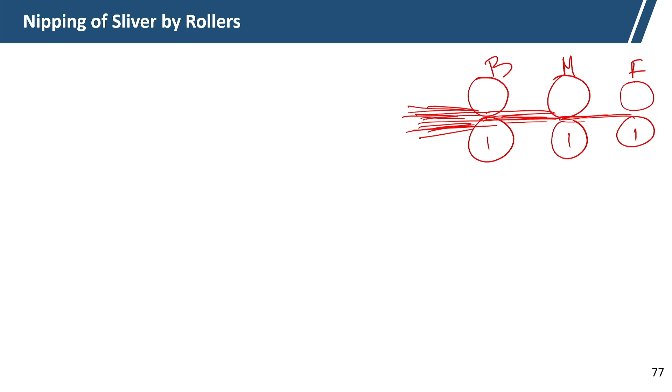The main issue here is that these are the front roller, middle roller, back roller, and these are the bottom rollers, and these two are the top rollers. So B2 is the top back roller, M2 is the top middle roller, and F2 is the top front roller.

Now the main drive, through the gearing arrangement, is given to all the bottom rollers. And the bottom rollers drive, with the help of frictional contact, gives drive to the top roller. Top roller does not have any positive drive, it gets drive from the bottom roller through frictional contact, and in between the fiber mass is there.

So the friction between the fiber and bottom roller and friction between fiber and top roller is extremely important, and along with that the pressure applied by the top roller on the bottom roller through the material is also important. So without proper nipping the drafting will not take place.

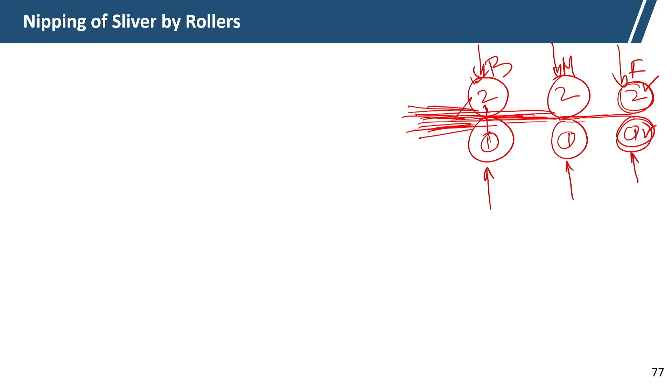So ideally there should not be any roller slip, the surface speed of the top roller must be equal to the surface speed of the bottom roller. So that we will discuss. First we will discuss the nipping process, then the issues related to roller slip we will be discussing.

Now if we see the diagram, to move the sliver by a pair of rollers, these are the pair of rollers - first pair, second pair, third pair. The sliver has to be gripped by the rollers. If they are not gripped by the rollers properly, then there will not be any draft, any stretch will not be there. So simply the roller will slip.

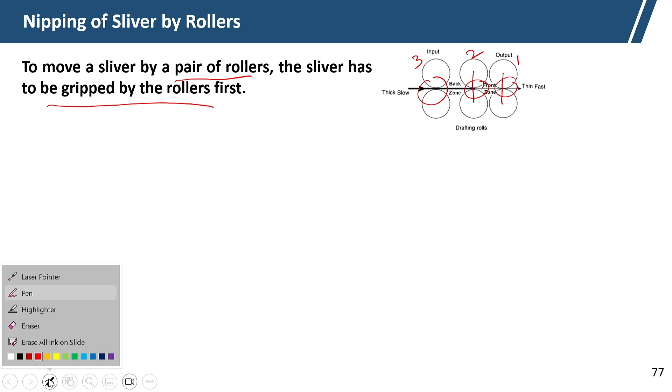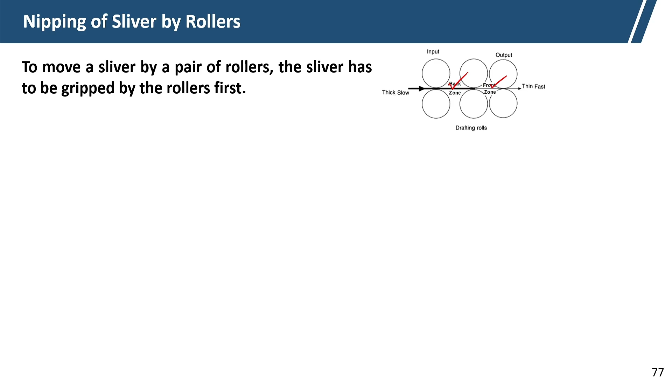Unless it is gripped properly, the motion from the bottom roller will not be transmitted to the sliver, and from the sliver it will not be transmitted to the top roller. That means both sliver and the top roller get motion from the bottom roller, through contact at the nipping point. Now the rotation of both top and bottom rollers will cause the sliver to move forward.

Now if the top roller does not rotate, only the bottom roller rotates, then the sliver will not move forward. So we have to actually move the sliver forward at the speed of the roller, that is the ideal case.

Now let W equal the force on the top roller. So force on top roller is W, and one component, here the contact angle is alpha. Contact angle is alpha, so the arc AC is the contact area, so contact length is arc AC.

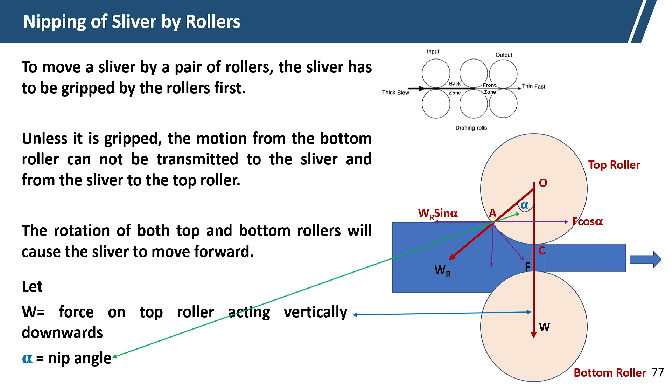Now at point O, that is the center of the top roller, W can be resolved. So here the W force is actually resolved into a radial component. So what is the radial component? This force WR is nothing but W cos alpha.

So this WR, this radial component, which is acting at point A, is W cos alpha, and in this direction W sin alpha, which will not be taken into consideration now. So W cos alpha. Now at point A, the arc AC represents the contact between the sliver and the top roller, that we have discussed. This is the contact.

Now at point A, the frictional force F acts tangentially. So when the roller rotates, the sliver is actually pushed by the frictional force, and it acts tangentially on the sliver, and frictional force F tries to pull the sliver. So this is pulling the sliver from the back, and then pushing it forward.

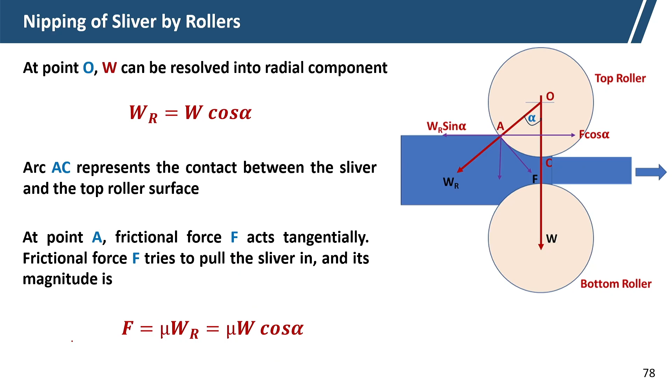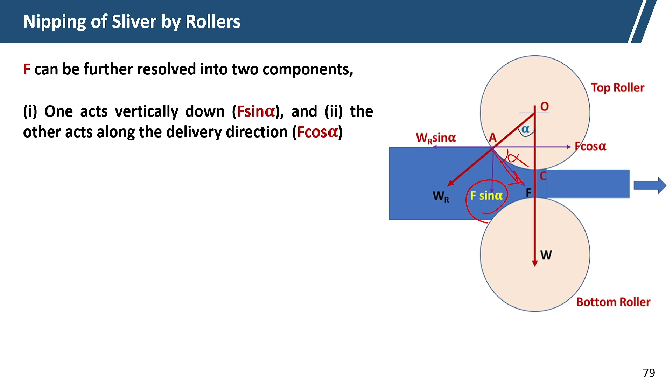So F can further be resolved into two components. This F has got two components: one is F sin alpha, and here it is F cos alpha. So this angle is alpha. If we look at the geometry, we can see this is alpha. So F sin alpha acts vertically downward, and F cos alpha acts along the delivery direction.

So this is acting towards the delivery direction, and WR also can be further resolved into two components. One acting vertically is WR cos alpha, this we are again resolving. Two components are there: WR cos alpha acting vertically downward, and another acting opposite to the delivery side, WR sin alpha. So WR cos alpha is in this direction, and here it is alpha. So WR cos alpha is acting downward and WR sin alpha is acting opposite to the delivery direction.

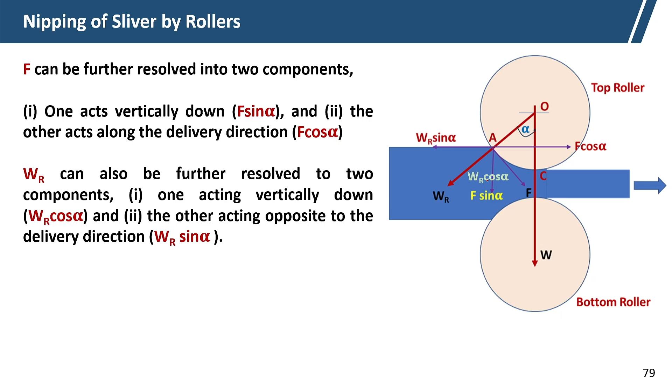So here WR cos alpha is there. Now hence WR sin alpha, this sin alpha component, therefore opposes the gripping by the roller. So that is opposing the gripping because it is actually acting against that.

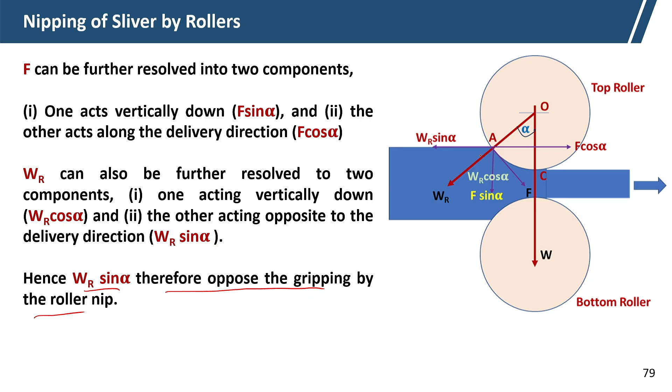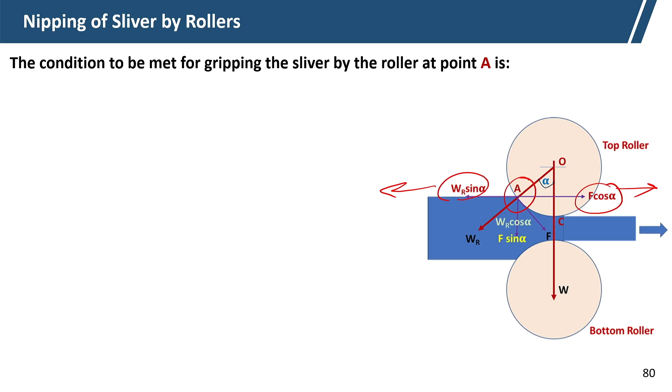So the condition to be met by this system for gripping the sliver at point A - what is point A? F cos alpha is towards the delivery side, and what is opposing this is WR sin alpha. So the horizontal component of friction, F cos alpha, has to be more than or equal to the resistance by WR, which is WR sin alpha.

So that condition has to be met: F cos alpha should be more than or equal to WR sin alpha. So in that case, in this condition the nipping will be proper.

So from this equation we get F by WR more than or equal to sin alpha by cos alpha. But F equals mu WR, we know F equals mu WR. So mu will be more than tan alpha, since F by WR is mu.

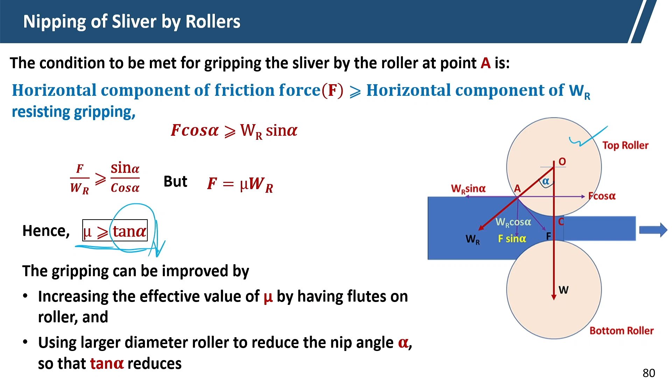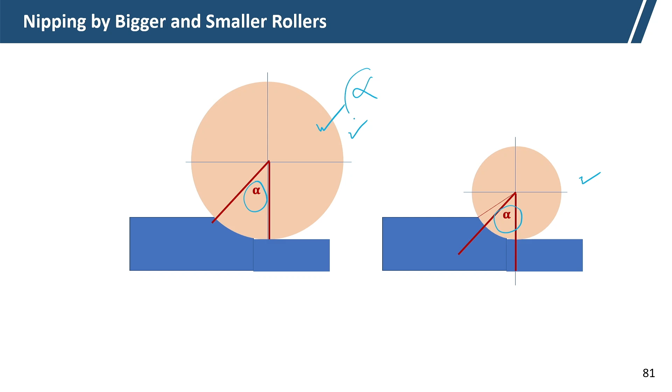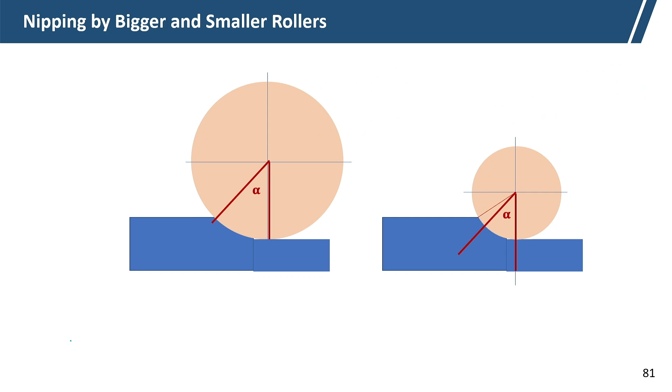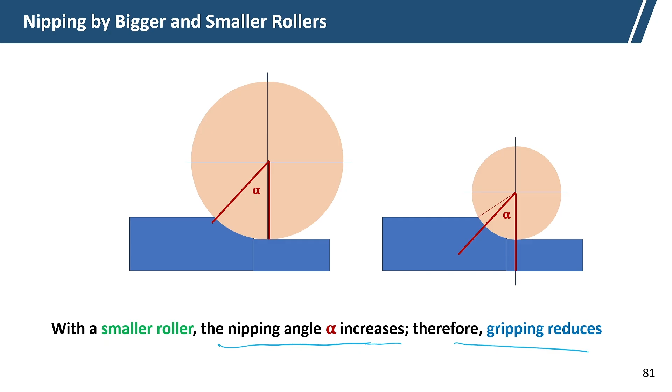Now we can see in this diagram, one is the larger diameter and here is a smaller diameter. We can see the alpha for both cases. For larger diameter roller it is alpha contact angle, but for smaller diameter roller, there is an additional contact angle, alpha plus delta alpha. That is the reason we always try to use the larger diameter roller at the top, to have better contact and reduce slippage. With a smaller roller, the nip angle alpha increases, therefore gripping reduces, so we have to increase the gripping.

Now our next topic is roller eccentricity, which is a very important aspect. This generates a fault due to roller eccentricity, giving a periodic fault, that ultimately cannot be eliminated even at the yarn stage, and the fabric appearance will be poor. This defective roller due to eccentricity can be identified using the spectrogram method, which we will discuss subsequently. But first let us see the implications of roller eccentricity, and we will do some theoretical calculation.

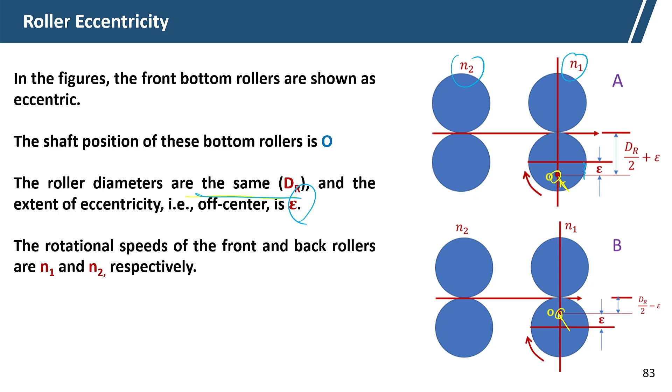Now let us see the velocity of the input rollers. This is V in roller, where dr is the effective diameter of rollers, and all rollers have diameter dr. The formula is pi d n, or 2 pi n times d by 2, which gives pi dr n. So the velocity of the feed roller or input roller for both cases can be obtained as pi dr into N, for both rollers.

But in case of the front roller which is eccentric, the velocity will not be equal to pi dr N1, it will actually vary due to the eccentricity. At position A, when the effective radius is more, what is the effective radius? dr by 2 is the average radius, plus epsilon is the effective radius at that point. So here it is dr by 2 plus epsilon, that is the effective radius.

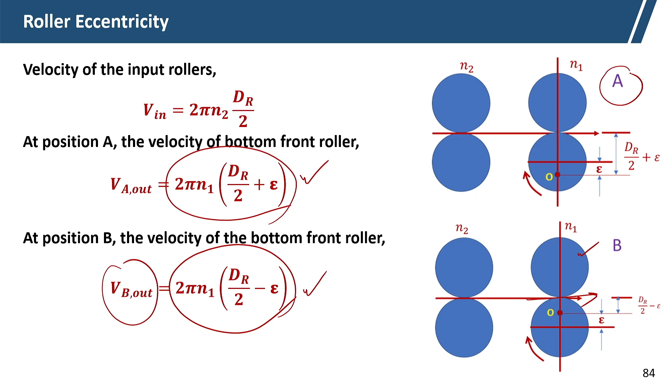So at point A there will be maximum stretch, because the back roller is moving at constant speed, but at point position A there will be maximum draft. What will be the draft? It is V A out by V A in, where V A in is constant, so this is the maximum draft. Similarly, minimum draft will be V B out by V A in. V B in and V A in are the same, because there is no deviation in diameter at that point.

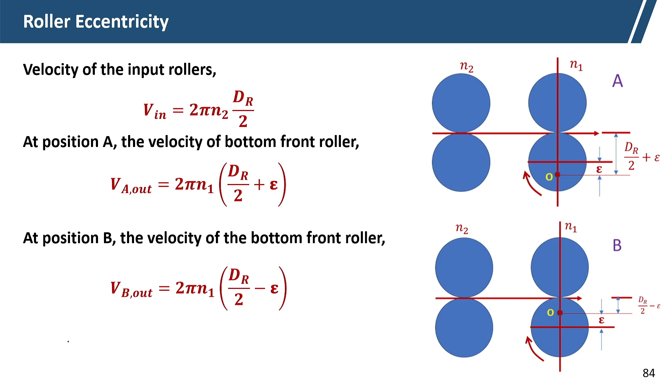Therefore, the speed of the emerging sliver will vary for each rotation. So whatever sliver is emerging, that will vary. At point A, the speed will be high with the higher draft, and at another point it will be lowest with the lowest draft. So as it is highest draft at point A, there will be maximum stretch, resulting in a thinner sliver output, and where the draft is low, it will result in a thicker sliver.

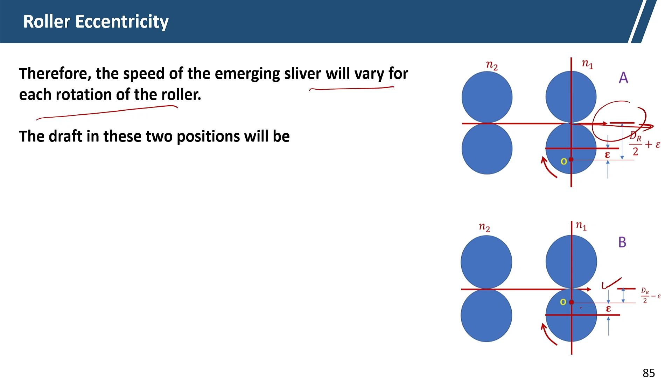So the draft in these two positions will be position A. So V A out by V in. So V A out is 2 pi n1 multiplied by dr by 2 plus epsilon, and V A in is 2 pi n2 multiplied by dr by 2. So just simplifying this equation, it is n1 by n2 multiplied by 1 plus 2 epsilon by dr.

That is the draft in position A, and the draft in position B will simply be 1 minus 2 epsilon by dr. So we can see the draft in position B is much less than, much lower than the draft in position A, and it depends on the level of eccentricity, that is the deviation from that point.

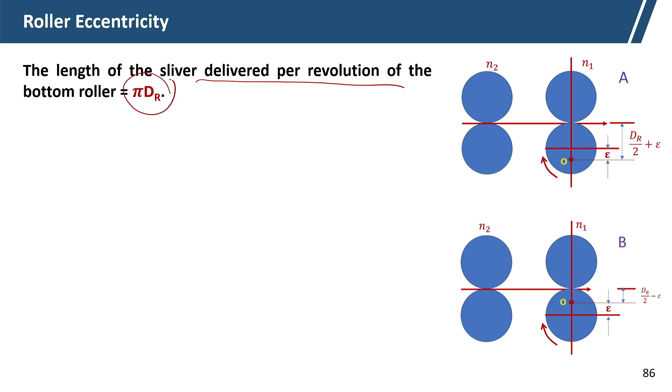So the length of sliver delivered per revolution by the bottom rollers is pi dr, that is the length of sliver delivered per revolution. So the draft will vary cyclically. So when position A reaches, the draft will be maximum, and when position B reaches, the draft will be minimum.

So there will be, as it is rotating, a cyclic variation of draft, and it will introduce a drafting wave. The wavelength of that drafting wave will be pi dr, because the effective length fed per revolution, the average total length delivered per revolution of the bottom roller, will be pi dr. So it will vary from this length to this length.

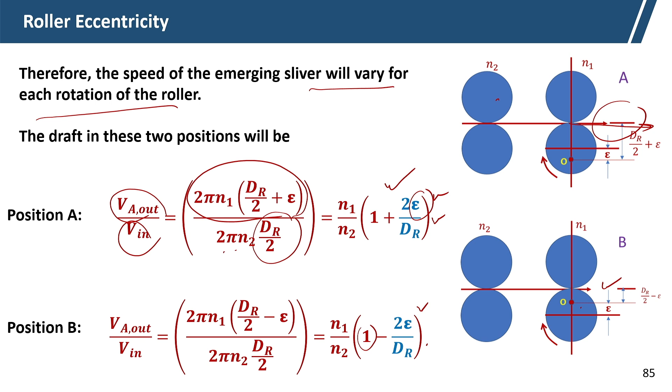So the percentage error will be calculated. At one place it will be plus 2 epsilon by dr, and at the other place it will be minus 2 epsilon by dr. So the percentage error will be plus minus 2 epsilon by dr. In one place it will be plus 2 epsilon by dr, and in the other case minus 2 epsilon by dr. That we have already seen in the earlier case.

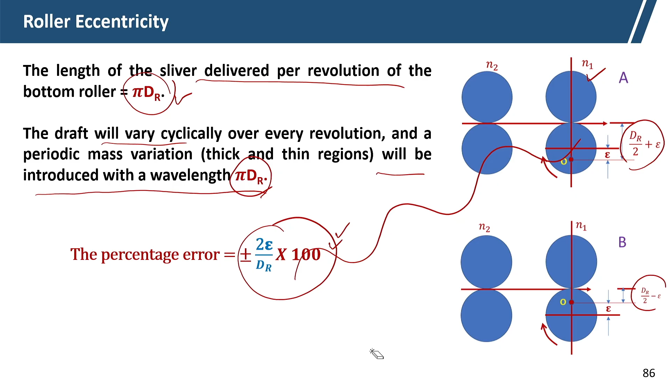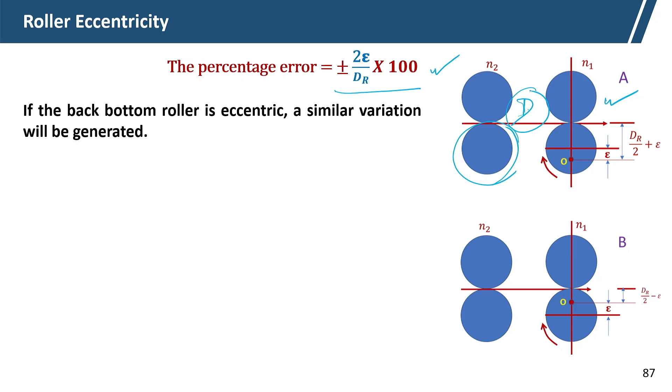That is the percentage error if the back bottom roller is eccentric. Now, what we have discussed is the eccentricity of the front bottom roller. Now if the back bottom roller is eccentric, the same error and variability will be there, the same calculation will apply, but the only difference is that if D is the draft, then it will be multiplied by the draft, so it will be stretched by that part.

And if both the rollers are eccentric, then there will be superimposition, so there will be multiple waves. So the wavelength variation is pi dr z, where z is the draft in this zone. So pi dr multiplied by z, that will be the wavelength.

So if the top rollers are eccentric, unlike the bottom roller eccentricity case, what will happen? Because as we know, the top rollers are not driven positively, they move by the frictional contact point with the bottom roller. So whatever motion they generate, their surface speed will be the same, because the bottom rollers are perfect, so their surface speed will remain the same, which is why no error will be produced.

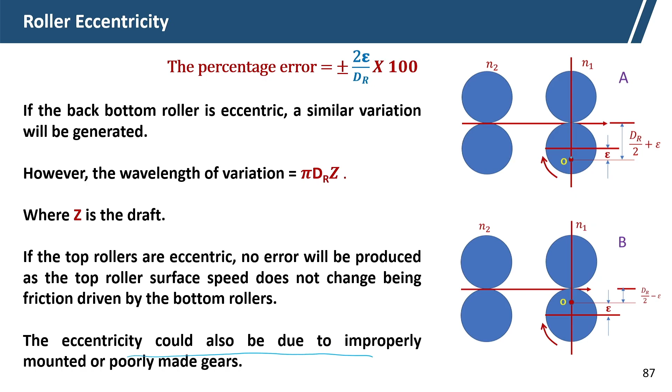Our next session is the roller slip. Roller slip is extremely important in drawframe blending, drawframe drafting, or any other drafting. Suppose there are two sets of rollers here - this is the front roller and back roller.

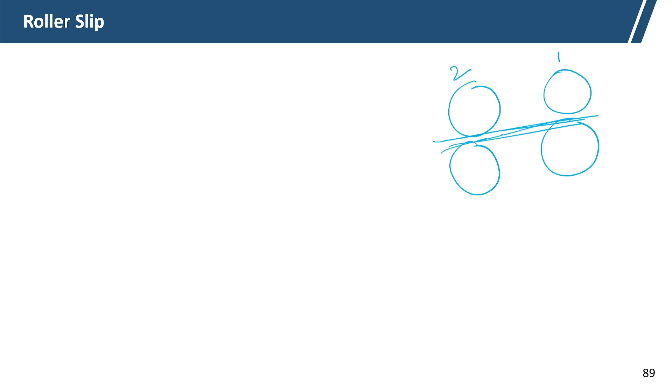This bottom roller, the front bottom roller, is rotating, and the idea is to pull the fiber at the same speed - to pull the fiber strand, and through this fiber strand the top roller also rotates. The top roller should have exactly the same surface speed. Suppose V1 is the surface speed of the front roller and V2 is the surface speed of the back roller, then the effective draft should be V1 by V2.

Now, if there is any slippage between the bottom roller and fiber mass, what will happen? VS1 is the speed of the front roller sliver after slippage. So VS1 will be less than V1. The roller is rotating and moving at V1 speed, but due to slippage the sliver is getting lesser speed. In that case the draft will get disturbed.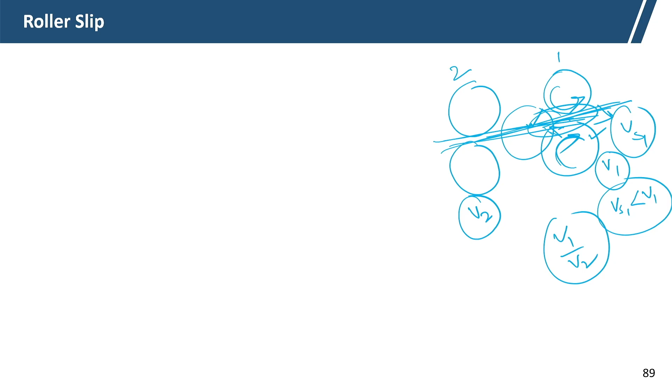So there are two types of slippage: forward slippage and backward slippage. They are related with the drafting force - let us discuss this issue.

In the draw frame, the bottom rollers are driven directly by a set of gears, positively driven, which in turn is connected to the motor. So through motor and gear, bottom rollers are driven directly and positively. There cannot be any slip, because gear does not slip. If there is a belt pulley, then there can be slip, but in case of the gear system, there cannot be any slip.

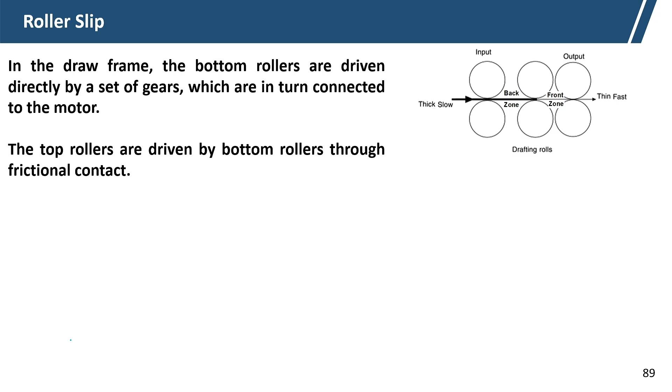So then what happens? The top rollers are driven by the bottom rollers through frictional contact, through the fiber mass. Here again the similar diagram is there - this is the bottom roller, here is the top roller, and through this fiber mass the top roller gets its drive, with the frictional contact there.

While running, there is no direct contact between the top roller and bottom roller, because in between there is fiber - fiber mats are there. A thick fiber mat stays between them, so there is no direct contact. In between the rollers there is a thick fiber mat present.

Now the bottom roller drives the fiber on it first, and the fibers in turn drive the top roller. So the top roller gets its drive from the bottom roller through the fiber mass. In case of sliver or in a drawframe, this fiber mass is very thick.

Only the top rollers have the possibility to slip. The bottom roller cannot slip - it will move at its own speed. Only the top roller has the possibility to slip, so the draft will change, because it is negatively driven.

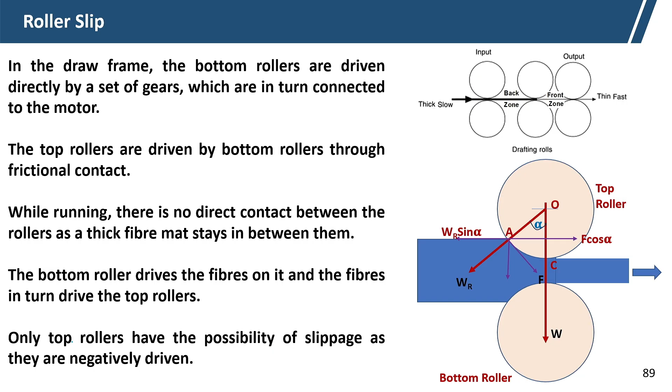The slippage means that the speed at the top roller is different from that of the corresponding bottom roller. The bottom roller is rotating at a certain speed, and the top roller rotates at a different speed. If you see the middle roller, the middle top roller can rotate higher than the middle bottom roller speed. That depends on whether the slip is forward slip or backward slip - this issue we will discuss here.

Ideally, the speed of the top roller and bottom roller should be the same, and the reason for slip is the imbalance in drafting force in the consecutive drafting zones. There is a drafting force between the zones, and if the drafting forces are imbalanced, slippage will take place.

Let us see the things here. At the back zone, the number of fibers is higher, thick fibers are there, it is compact, and at the front zone the number of fibers is lower because the back zone draft is there. Now, as we know, the drafting force depends on the number of fibers, and if we consider the nip lengths are same, the drafting force at the back zone will be higher than the front zone.

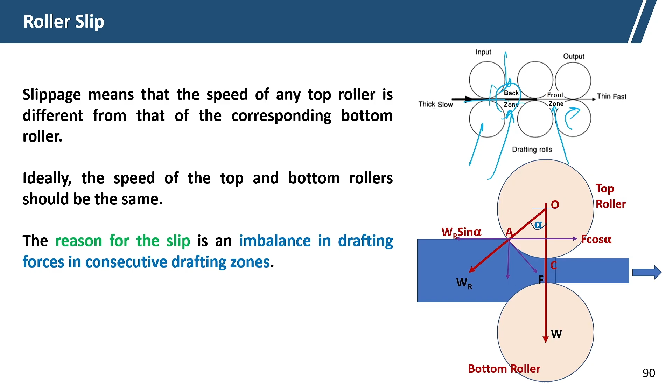Now, as it is higher than the front, the front roller is pulling the fiber strand and it is moving, but at the back zone, due to higher drafting force, the back roller is moving at a slower speed. So the fiber strand at the back zone tries to pull the roller back, giving a force in the opposite direction, which results in the slowing down of the middle top roller as compared to the middle bottom roller. This is called negative slip.

So the imbalance of drafting force between consecutive sections is the main reason for this. If the drafting force in all these sections is the same, then we will not have this type of problem.

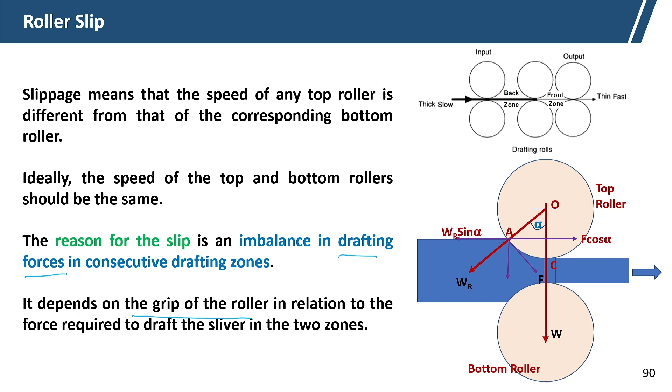The drafting force is also inversely proportional to the draft. As we discussed earlier when we derived the drafting force equation, the drafting force is inversely proportional to the draft given in the fiber strand, when the draft is above the stick-slip region.

The roller slip also increases rapidly as the setting becomes closer to the fiber length. That means if the setting is very close, the drafting force will be very high, and in that case there will be slippage. Also, if the fiber length is more than the setting, very low setting, then also roller slippage will occur as the fiber starts slipping.

That issue we have already discussed. There can be two types of slippage: one is backward slip, and another is forward slip. We will now discuss these two issues.

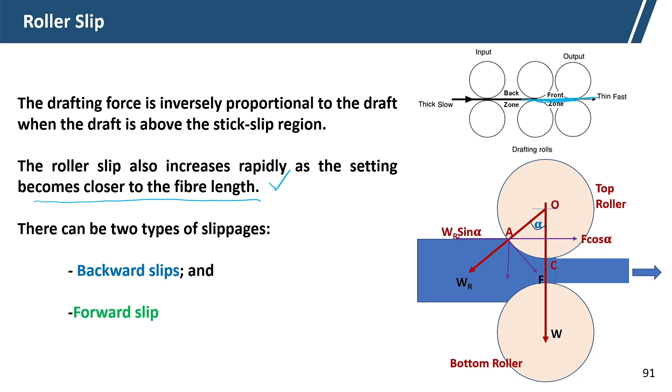Backward slip is the situation where the sliver is held back by the roller behind it, causing the top roller to run slower than the bottom roller. If we consider the second roller in a four-roller drafting system, the conventional drafting system, we are discussing the draw frame with this setup.

In the four-roller drafting system in the draw frame, considering the second roller, the draft distribution is 1.2 at the back zone, 1.7 at the middle zone, and 2.9 draft in the front zone. This middle roller is the one we are considering for slippage. What is that?

If the middle top roller slips, what will happen? V2t means the second top roller speed is less than the second bottom roller speed. So this roller will rotate at a slower rate, and there is a slippage.

Now, to enlarge this we are using this diagram. Here it is the second bottom roller and second top roller.

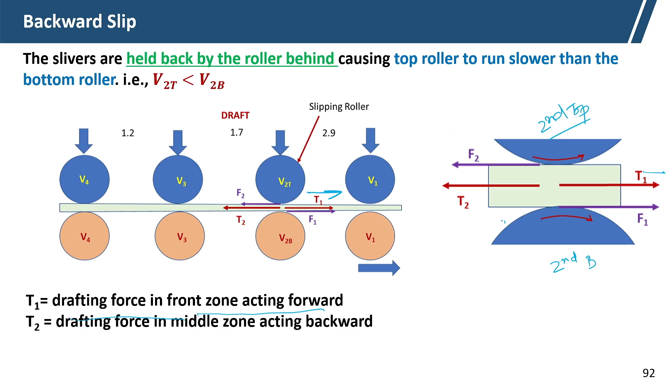Now we are discussing the backward slip, the draft T1. T1 is the drafting force in the front zone acting at the forward force, so this strand will be pulled at force T1 at the front zone. The drafting force at the middle zone is T2, which resists the movement of the second top roller.

F1 is the friction on the bottom roller, the frictional force between the bottom roller and the bottom surface of the fiber mass, which acts to pull the fiber forward. F2 is the reaction friction force required to slow down the top roller, acting backward, so this reaction force acts in the backward direction.

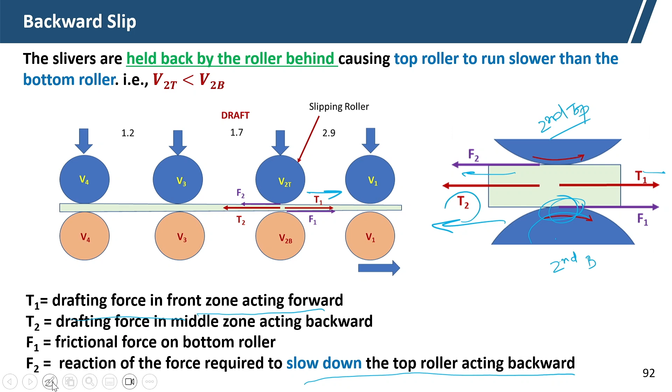The draft distribution is such that the number of fibers under the front roller nip is about one-third that of the middle roller nip, because the draft distribution is approximately 2.9. So if the draft is 3 here, the number of fibers at the front roller nip will be about 1 by 2.9, which is approximately one-third that of the middle roller.

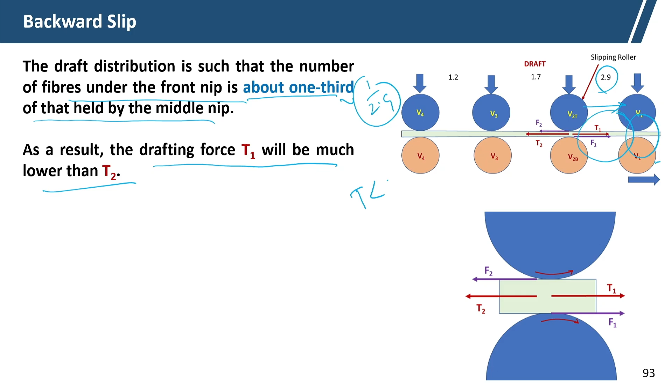So as the number of fibers is less at the front roller, the drafting force will be less. As a result, the drafting force T1 will be much lower than T2. Hence, the second top roller is prone to slip, since T2 will resist the movement of the second top roller.

The condition for slip is that T1 plus F1 is less than T2 plus F2. So the total backward force should be more than the total forward force. T2 plus F2 will try to pull back the top roller and it moves slowly. Although it will move in the forward direction, it will be at the speed of the third roller.

Or, just rearranging, F1 minus F2 is less than T2 minus T1 for the slip condition. For the no slip condition it will be just reverse: F1 minus F2 should be more than T2 minus T1, because that will mean the second top roller moves at the speed of the second bottom roller.

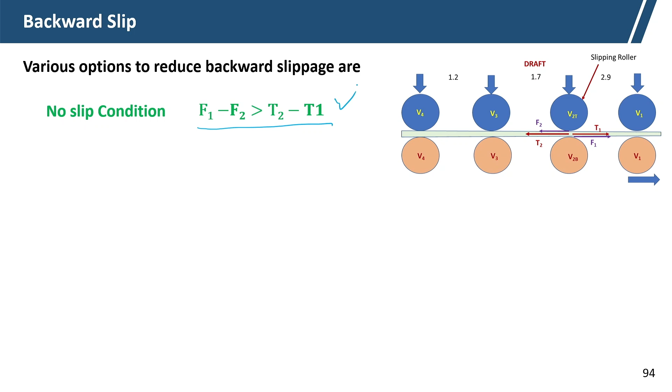Now, various options we have to see. This is the no slip condition. Now how to achieve this condition? Let us see, and accordingly the draw frame development took place. So the main condition is, if we want to maintain this equation, what do we have to do?

We increase F1. F1 is nothing but the friction between the bottom roller and the fibers. So how to increase the friction? We have flutes on the bottom roller, that is why we use flutes, and we increase the top roller pressure.

So to increase F1, which is the frictional contact, and as we discussed earlier, frictional force is the frictional constant multiplied by the normal force. So if we increase the normal force, F1 will increase. This is one way, and another way is to reduce T2.

Either we increase F1 or reduce T2. How will T2 get affected? We reduce the draft in the middle zone, bringing it close to 1, so we do not use any draft at the middle zone. If we can do this, then the drafting force will be lower.

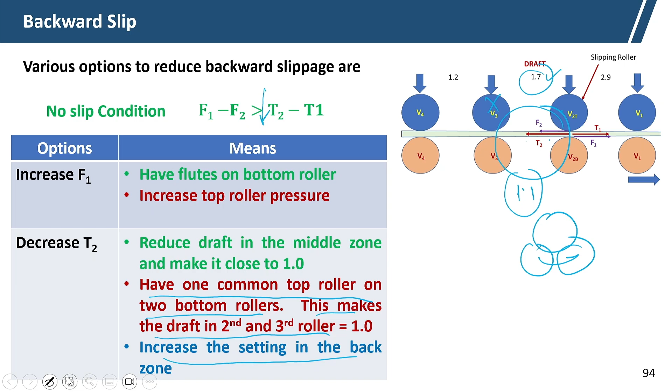So here 1 draft is maintained, and we increase the setting at the back zone. If we increase the setting at the back zone, then drafting force will reduce. So T2 will be reduced, we decrease T2 in this fashion. Increasing the setting means we are reducing the drafting force.

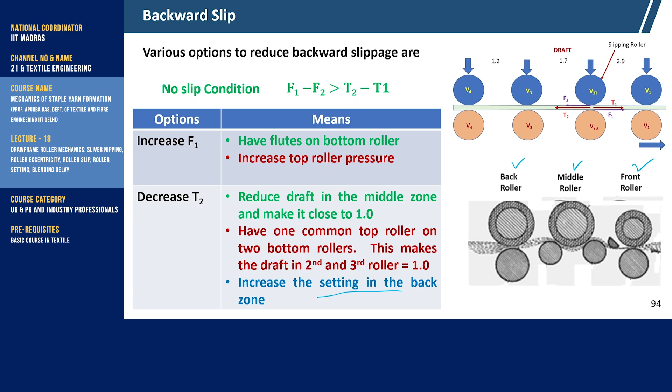So this is the way of doing it - this is the middle roller, front roller, back roller. That is the reason we use 3/4 or 3/5 type of settings, because we want to maintain the draft low at this point.

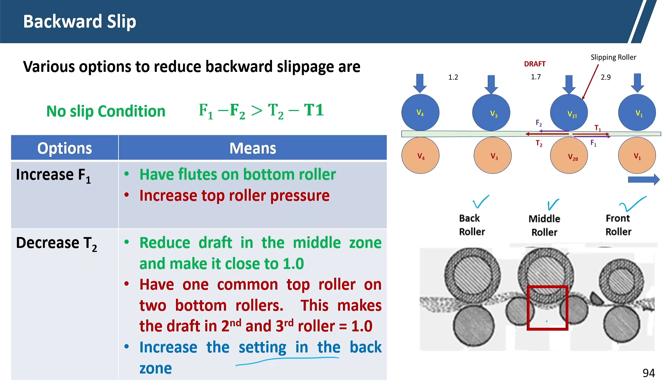Now, the fibers are pulled by the roller ahead. Any fibers are pulled by the rollers ahead of them, and what we are now discussing is the forward slip. Earlier, the backward slip was very common; now we discuss the forward slip. These fibers pull the roller ahead, causing the top roller to run faster than the bottom roller. The bottom roller moves at its own speed since it is positively driven, but if the fibers pull the top roller ahead, there will be forward slip, because the top roller will move at higher speed than the bottom roller.

Here you can see this is 3T and 3B. We are discussing here out of 4/4, specifically the second, third and fourth rollers. So V3T, the third top roller, is moving at higher speed than V3B, the third bottom roller. This is called forward slip.

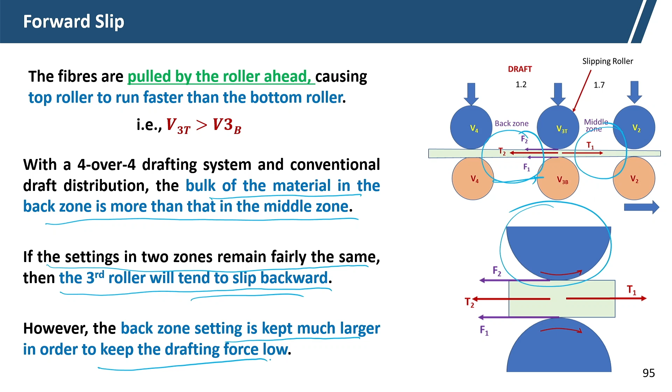However, the back setting is kept much larger to reduce the drafting force. We want to keep the drafting force low at the back zone because the number of fibers is more there, so we keep the setting larger.

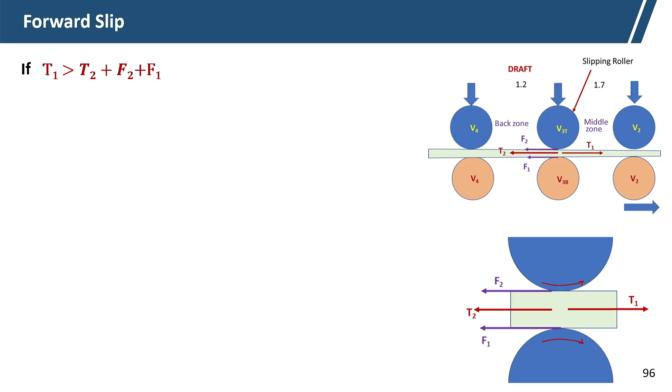So if T1 is more than T2 plus F2 plus F1 - because normally F2 should act in the backward direction, and F1 is also moving in the backward direction, but here the pull is in the forward direction - then T1 minus T2 will be more than F1 plus F2, and the third top roller will slip forward.

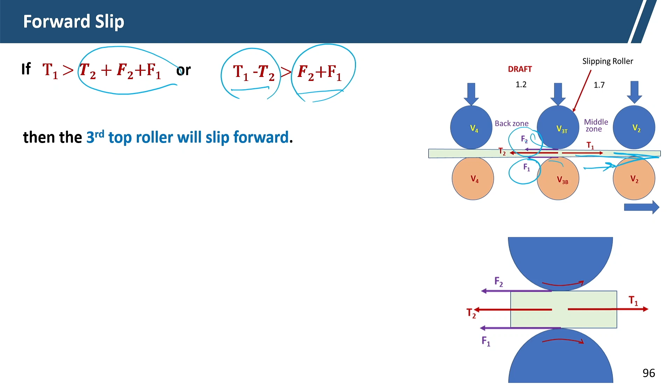So if T1 is more, then only the third top roller will try to move at a faster speed than the third bottom roller. Now how is this condition achieved? The condition is satisfied only when F1 and F2 are too low, because T1 minus T2 is more than F1 plus F2, so F1 and F2 have to be very low.

How can the frictional force be very low? The frictional resistance can be very low if the top roller pressure is low - that reduces frictional resistance - and if we use a very smooth surface, then also frictional resistance will be very low.

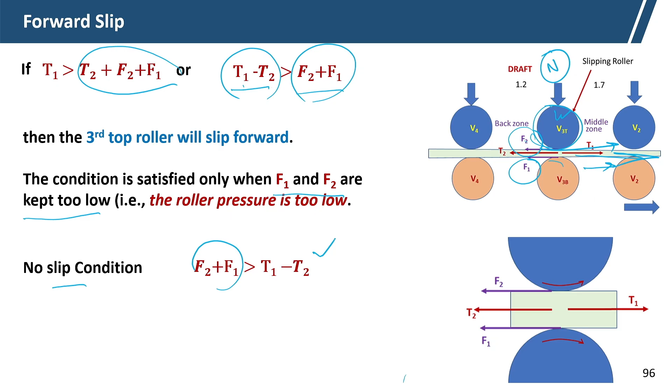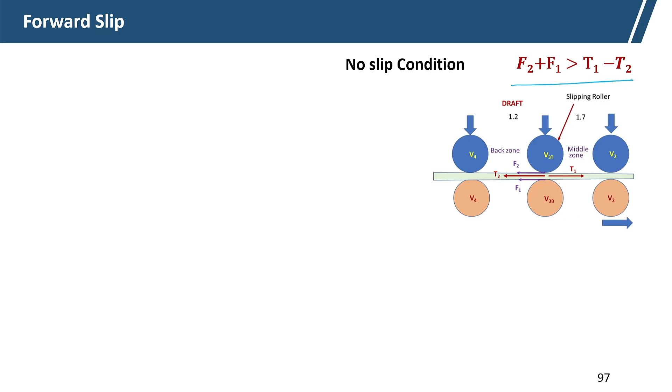In no slip condition, F1 plus F2 will be just reversed, T1 minus T2. In no slip condition, for forward slip we are discussing, F1 plus F2 is more than T1 minus T2. So, what are the options?

If we want to avoid forward slip condition, we can increase both F1 and F2. This can be achieved by having a flute on the bottom roller, which increases F1, and by having a rough surface so that we can increase the friction between the top roller and fiber mass. So, F1 and F2 can be increased by increasing the top roller pressure as mentioned earlier.

Then, decreasing T1 and increasing T2. If we decrease T1 and increase T2, we can achieve this. So what we do is reduce the draft in the middle zone and increase the draft at the back zone. This way we can manage the drafting forces, and have one common top roller on two bottom rollers.

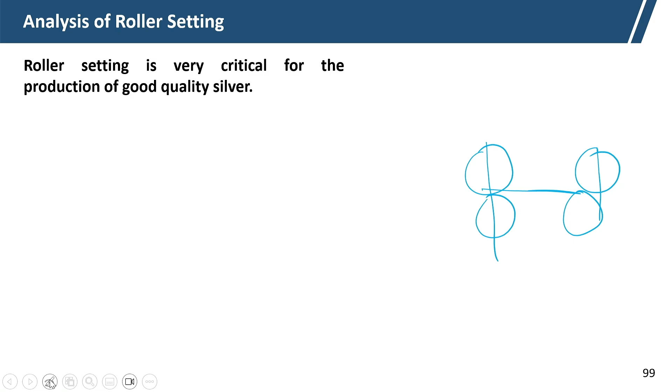So we will now see how the roller setting is calculated. This is the arrangement here. Let us consider three pairs of rollers: back pair, middle pair, and front pair. Here, the nip point at the middle zone is P, and the nip point at the front roller is B. They are not in the same plane, and at the same time they are not in touch. So there is a gap, denoted by a.

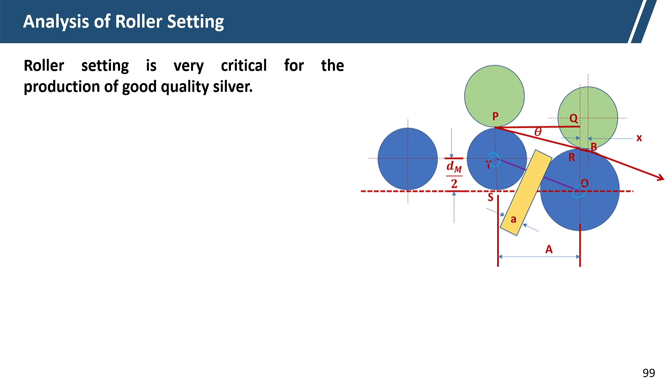Accordingly, we will try to calculate the roller setting here, the nip-to-nip distance, which as per this picture is PB. PB is our ideal distance, whereas the center-to-center distance is TO, and A is the gap at that point. So when the rollers are not in the same plane, the sum of their axial distance between the bottom roller and the gauge is not equal to the nip-to-nip distance PB. So it's not simply radius plus A; it is not that straightforward, the distance over which the fibers get drafted.

Fibers are getting drafted between these two points, P and B. The nip-to-nip distance is governed by the entire arrangement, the angle theta and the plane position, and this distance is important as it controls the irregularity of the sliver generated.

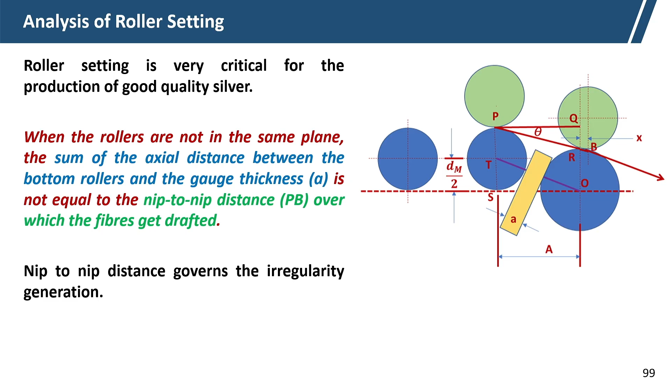Let us take the case of a 3 roller drafting system, where the front top roller is not placed exactly on the top of the front bottom roller. It is shifted here towards the front by x, slightly ahead of its center by x.

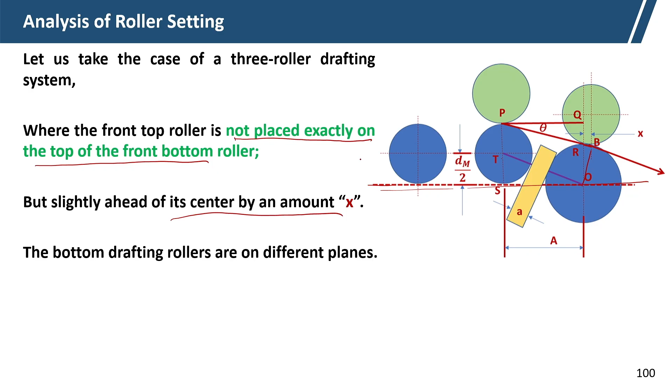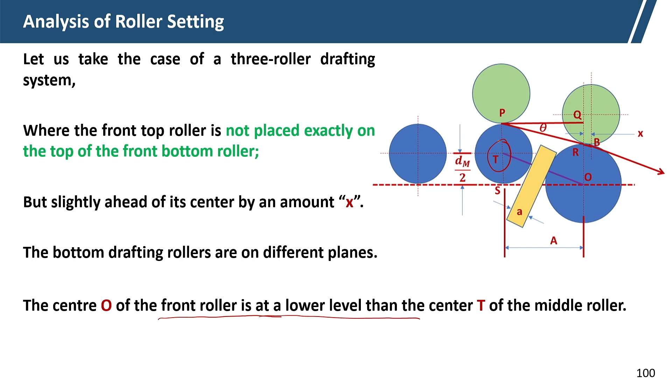The bottom drafting rollers are on different planes. This front roller is in this plane, and the middle roller is in this plane. They are placed in different planes. The center O of the front bottom roller is at a lower level than the center of the middle bottom roller. So they are at different planes.

Let the diameters of the front and middle bottom rollers be df and dm, and A is the gauge thickness, the roller to roller distance. So we can see here the distance OT will be df by 2 plus dm by 2 plus A. This is the distance.

From the geometry we can see PS, which is the diameter of the middle roller, and PS is nothing but OQ. Now QR is nothing but OQ minus OR. OQ is dm, as we know, and OR is the radius of the front roller, df by 2. So QR is calculated.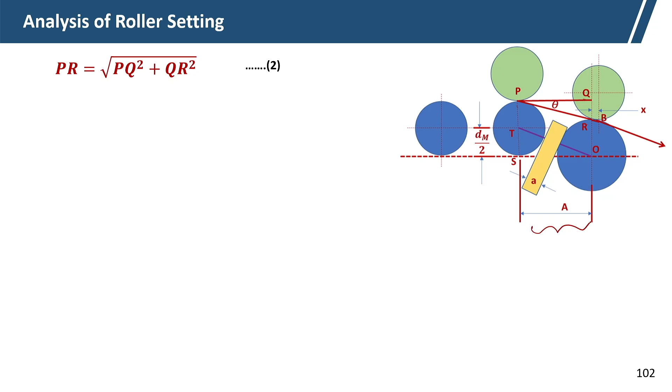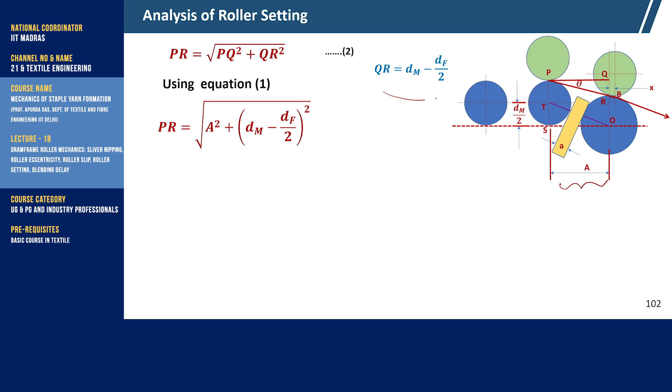Now from this triangle PQR, we can calculate PR. We know A is the center to center distance in the horizontal plane. Using equation 1, we know QR equals dm minus df by 2. So QR is replaced, and PR will be under root PQ square, where PQ is equal to A, plus QR square.

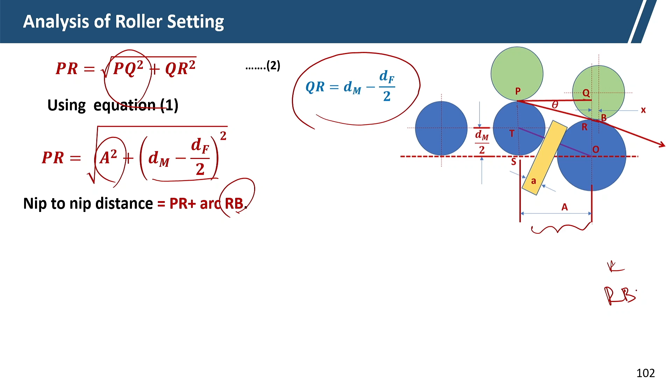So now the nip to nip distance, this distance and this distance, PR, is that distance plus the arc RB. This arc RB, being very small, can be assumed to be equal to x, the distance x, which is the shift of the front roller towards the front.

Now for triangle OTS, what we get is A square equal to OT square minus ST square. Then the center to center distance A can be calculated. OT equals the radius of the middle roller plus radius of the front roller plus a.

So radius of middle roller and front roller plus a, that is OT. And ST is nothing but the radius of the middle roller, so dm by 2.

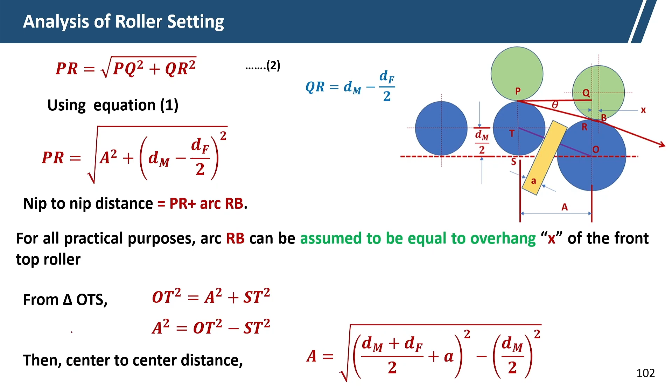So from there, the drafted fibers emerge from the delivery roller nip at an angle close to theta. That is the drafted sliver from the delivery point, at an angle with the horizontal plane.

Now from the geometry we see tan theta equals QR by PQ. QR is dm minus df by 2, and PQ is nothing but A. So tan theta, and therefore theta, this angle, is tan inverse of dm minus df by 2 by A.

So that theta angle depends on given values of dm, df and A. As we increase the setting, that is the center to center distance A, we can reduce theta, meaning we can reduce tan theta. So from here we can actually do all these calculations and calculate the roller setting distance.

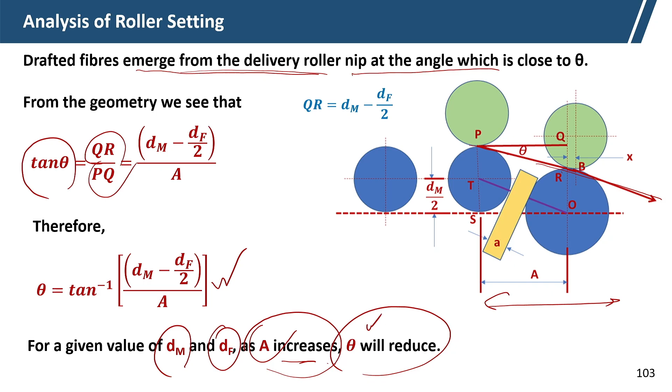Now we will discuss the blending delay time at the draw frame. We have discussed the blending delay time in the blow room and how we can control it in carding. Now here is the blending delay time in the draw frame section.

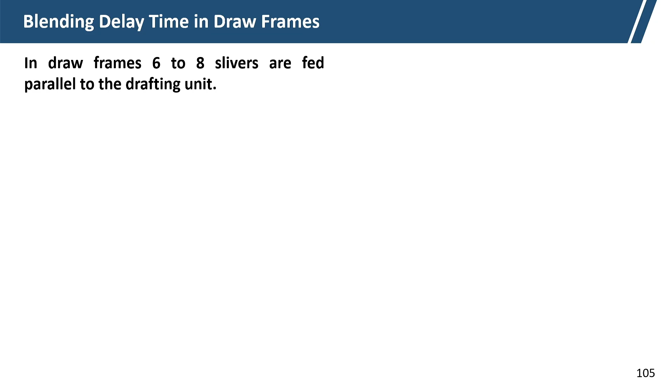In the draw frame we normally set 6 to 8 slivers fed parallel to the drafting unit. If the slivers originate from the same carding machine, then the slivers produced over a period of time get the opportunity to be mixed on the draw frame. So blending delay time means you are feeding at different times, but they will get a chance to be mixed up.

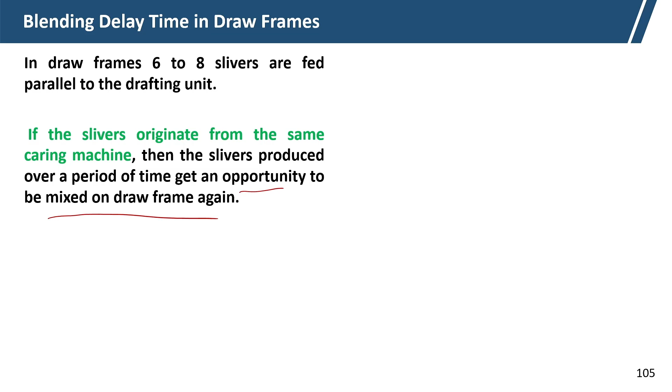Let us see the slivers from first, second till nth can are brought together for doubling and drafting at the draw frame simultaneously.

Suppose there are n slivers fed at a time in the draw frame, typically 6 to 8. So n slivers are there.

That means they are produced at different times, but they have the chance to mix together. So here, what will be the blending delay time? Blending delay time will be the time to fill one can, which is T.

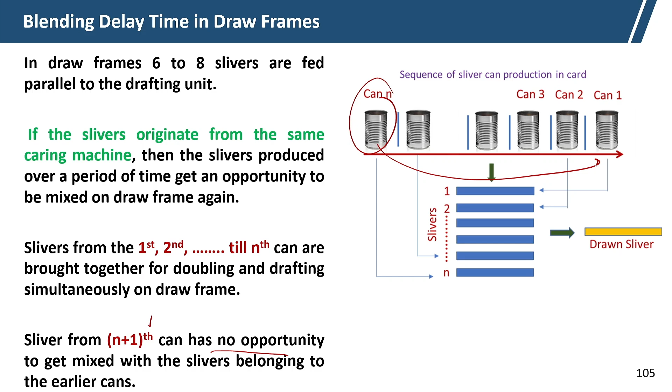In that case the blending delay time is calculated. So sliver from n plus 1th can has no opportunity to get mixed with the sliver, but the nth can will have the opportunity to mix there, because they will get exhausted at the same time. Then the next cycle will start.

Thus, blending delay time in this case is the difference in time required to produce the first and nth sliver, which can be doubled in the draw frame together.

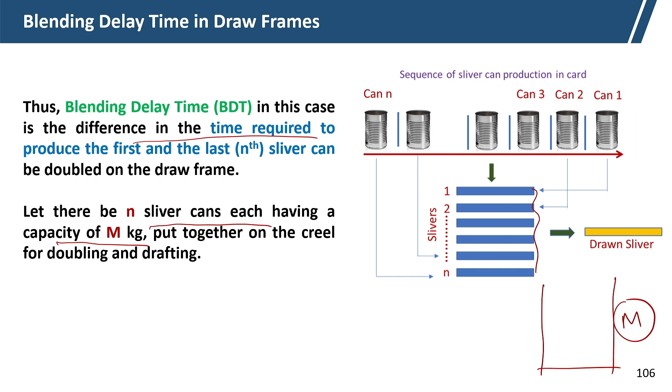Let n be the sliver can number, with each can having a capacity of m kg. If we know the delivery speed and the sliver hank, then we can calculate the total time required per can.

Delivery speed is in kg per minute, and M is the total capacity. So for the first can, the time required is M by delivery rate, that much minutes. For the nth can it will be Tn, which is n multiplied by M by delivery rate. So this difference, Tn minus T1, is the blending delay time.

Blending delay time will be Tn minus T1, which equals M by delivery multiplied by n minus 1.

From the above equation, it can be said blending delay time depends on the delivery rate. If we reduce the delivery capacity, blending delay time will be increased. If we increase the can capacity, blending delay time can also be increased.

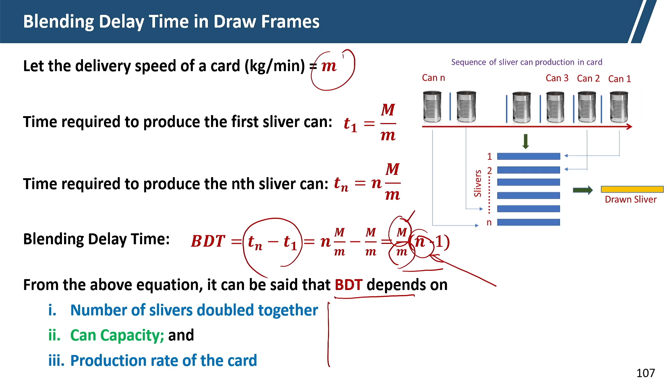And here the condition is that they are coming from the same card.

However, if the can capacity remains the same, the production rate of the card changes the time required to fill the can. So can capacity normally remains the same.

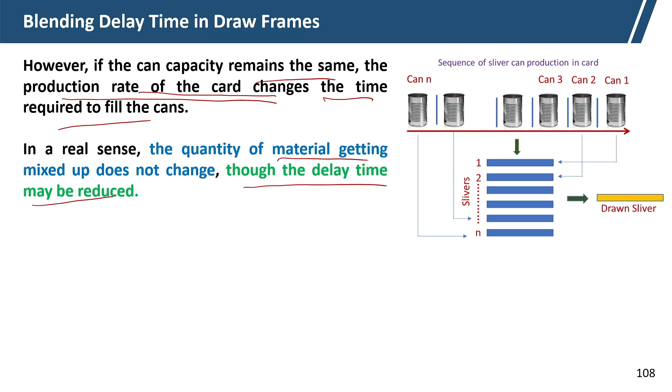In real sense, the quantity of material getting mixed up does not change, the quantity does not change, though the delay time may be reduced.

The weight equivalent of blend delay time is therefore the total weight of sliver that can be mixed with the sliver in the first can. So that is the weight equivalence of blending delay time.

This is the equation: weight equivalent of blending delay time is nm minus m, which equals m multiplied by n minus 1.

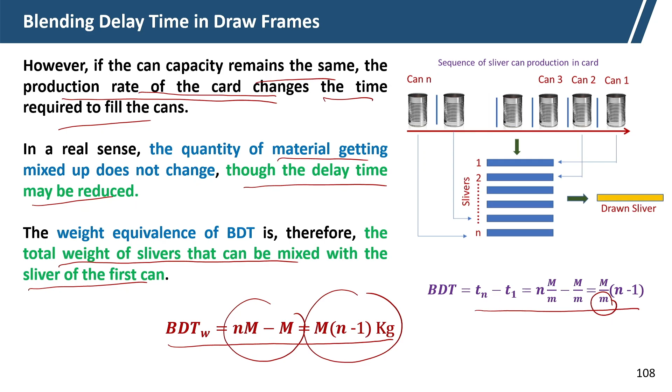And this is the normal blending delay time, where we are actually considering m as constant, with no change in the can capacity.

This is the weight equivalent, where the material delivery is normalized.